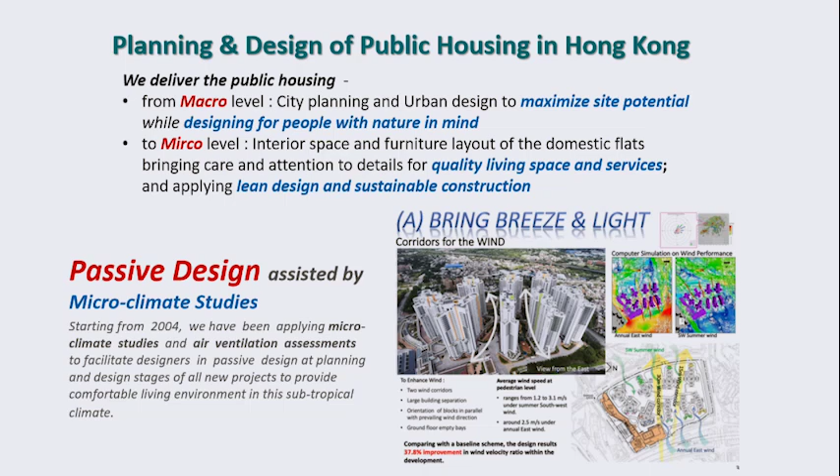Next slide, please. I'm going to go quick for these slides. Planning for people, we have baseline performance with the planning requirements, and we consult stakeholders. For consultation, we consult everybody in the neighborhood and in the community. With a comprehensive approach, we provide transport, car parking, community centers, social welfare facilities, education, retail facilities, pedestrian circulation, and local spaces and landscaping. We have at least 1 square meter of open space per person in our estates, and 1 tree for every 15 flats at least.

And for our green ratio, it is 30% of the site area for sites over 2 hectares. For smaller sites, at least 20%. So make it green, make it healthy for everyone. Next slide, please. Next slide is planning and design, people with nature in mind. We have a host of technical studies helping designers to integrate passive design elements holistically and refine the estate layout and building disposition. So it's a balanced design assuring social, economic, and environmental sustainability, maximizing development potential, and fast-tracking delivery of public housing. Next slide, please.

Next, I'm going to give you an overview. We have to bring breeze and light with passive design micro-climate studies, and we need a quiet environment for living. We have noise mitigation measures. The third one is universal design for people of all ages and abilities. The fourth is improving habitable space, enhancing usability and durability. The fifth is enhancing healthy living, saving water, improving energy efficiency. And the sixth is greening for healthy living and avoiding urban heat island effects to ensure a green environment and a healthy living environment with social cohesion.

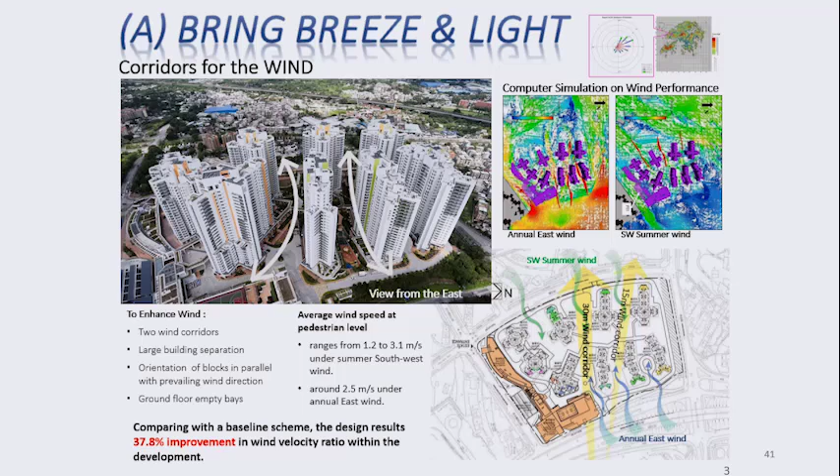This is bringing breeze and light. I have to skip because the time is limited.

We use BIM as a design tool to help us with standardized modular flats with rotational symmetry and fair-face concrete, with lean construction so that we can simplify the building process and make it mechanized.

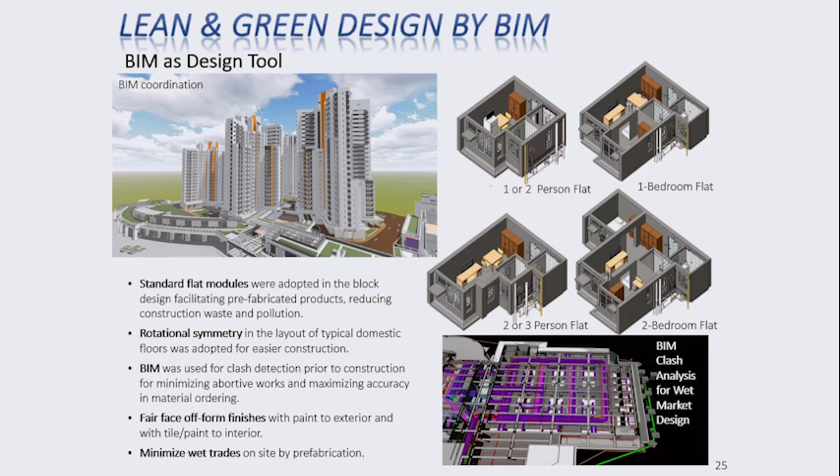We reduce carbon emission at the detailed design stage by assessing 6 aspects of carbon emission.

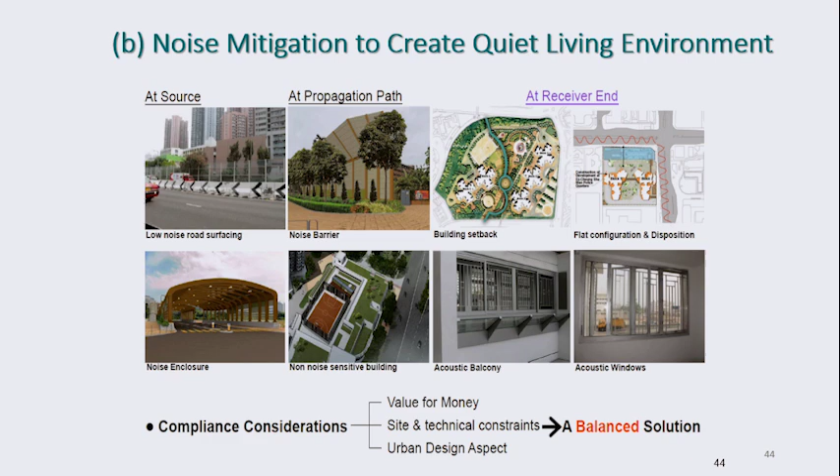We are in a dense urban area, and we have an efficient transport system. That's why we have traffic noise, and we have to mitigate traffic noise for this purpose.

This is a design that enables people of all ages and abilities—the old, the young, the handicapped—to also use the spaces in the estates and in the living area easily.

Even though the flats are small, they are all accessible.

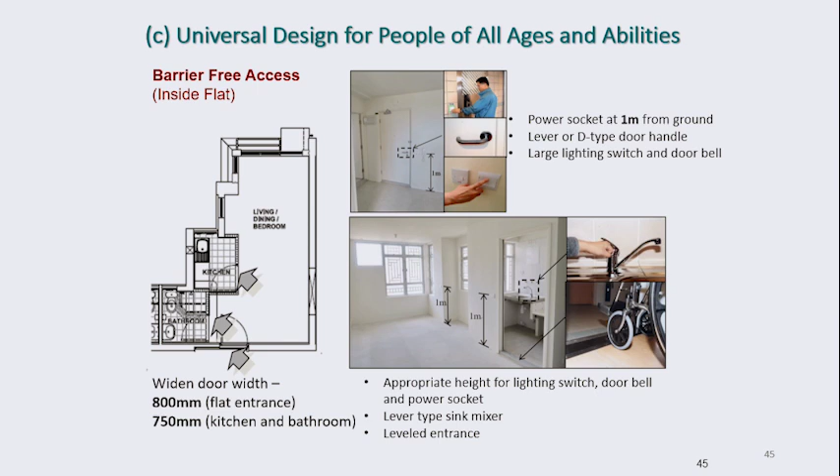Improving habitable space and enhancing buildability with functional and cost-effective design using modular flats.

And now we can have modular integrated construction as well. So prefabrication has been with us for a long, long time.

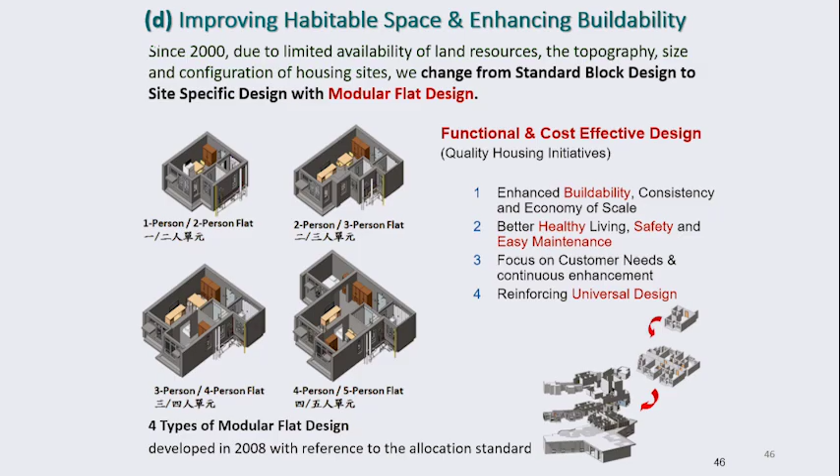That shows the smallest flats, for 1 to 2 persons, with only 14 square meters internal floor space. It's the smallest one, and we have site-specific design with a modular design.

I would like to show you some of the other slides later. That is improving energy efficiency and saving energy with a 2-level lighting system for the public areas.

Green living and avoiding the urban heat island effect, with a green ratio up to 30% for large sites. We provide a community farm in every new estate so that people can use the farm as an urban farm as well.

Next is saving water, and we try to use zero irrigation as well. Because we're greening and we want to save water, what do we do? We innovate and we use zero irrigation.

Next is the housing ladder story. This is a long story spanning 7 decades, so I'm going to go quickly.

This is the first of our estates, 7-story walk-ups. This is a vertical city, by the way. The ground floor is provided with shops, the roof has a school, and the 6 stories are habitable dwelling units.

These are non-self-contained flats that we built in a kind of emergency situation. So these are all living units with communal bathrooms and no kitchen—they have to cook at the corridors.

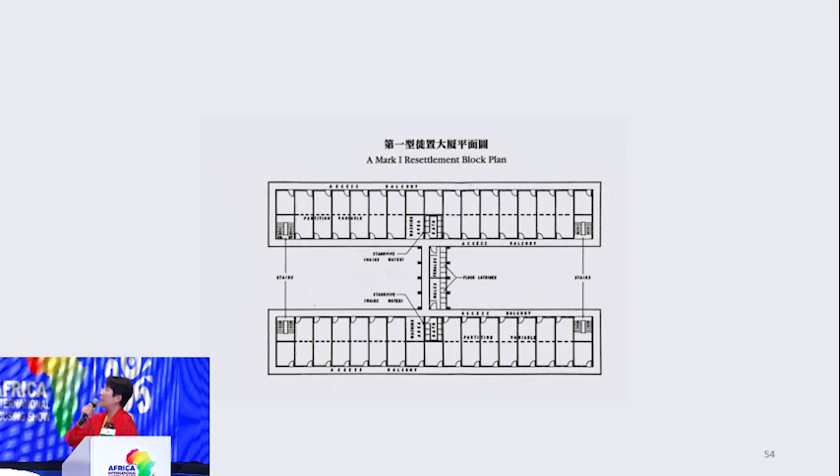This is the plan of the building. As I mentioned, they only have communal bathrooms or washrooms in the center.

And it's not only housing—we also provide them with work. We built some factory estates in the vicinity to enable them to continue with their place of work as well. These comprise 6-story blocks without lift service, built between 1957 and 1965. So it's not only housing, but also places of work and community facilities that we built in those days.

So these are the other scheme, which is the low-cost housing program. The buildings are much better than the resettlement estates, but they are still low-cost housing, built in the 1950s to 1960s.

In 1964, government published a white paper entitled Review of Policies for Squatter Control, Resettlement and Government Low-Cost Housing. So this is the beginning of the housing ladder. The temporary housing scheme was launched to accommodate those who were not immediately eligible for permanent public housing.

So this is the 1964 housing ladder. We have the cottage areas, the temporary housing scheme, and then resettlement estates. And next level up will be low-cost housing estates. And then for the private housing, we have tenements, ordinary apartments, and luxury apartments and houses. So this is the housing ladder.

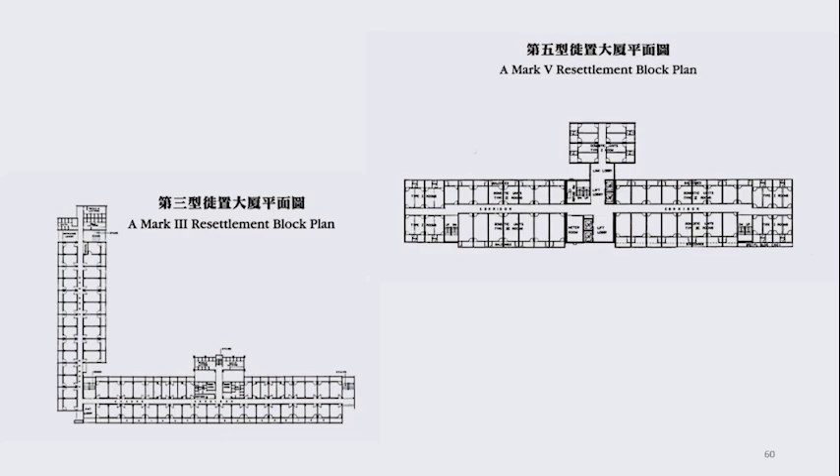And in the 1960s to 70s, the Twin Towers were designed and built, and they built taller buildings. In 1973, the public housing bodies were reorganized, and a new housing authority was born.

In 1972, government announced a 10-year housing program. And with the development of the Mark I and Mark II resettlement estates, because they are not really suitable for sustainable living, they started to demolish, beginning in Shek Kip Mei.

In 1976, this is the beginning of the subsidized home ownership scheme. Government decided to implement this scheme to enable lower middle income families and public rental housing tenants to acquire their own homes. So they moved one ladder up, one step up.

Instead of rental, they moved to subsidized sale flats. And in 1978, to speed up the home ownership scheme program, government invited the private sector to participate in the private sector participation scheme, the PSPS. So this is another innovation in policy in those days.